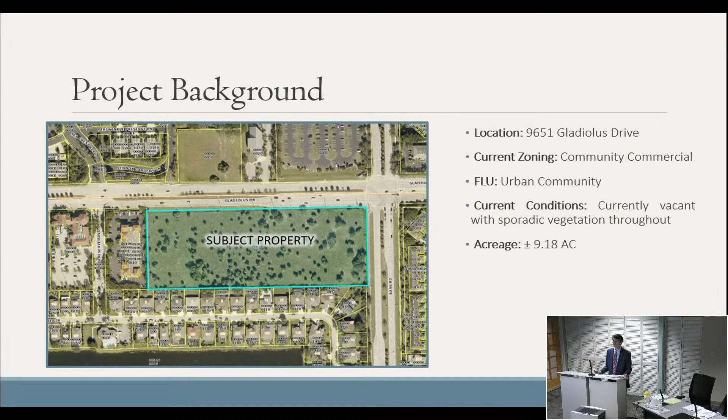So I'll briefly go into the project background before Mr. Shute comes up. As mentioned earlier, the project is 9.18 acres, located at 9651 Gladiolus Drive at the southwest intersection of Gladiolus Drive and Bass Road. The current zoning on the property is community commercial, and the future land use is urban community. It's currently a vacant lot with sporadic vegetation throughout.

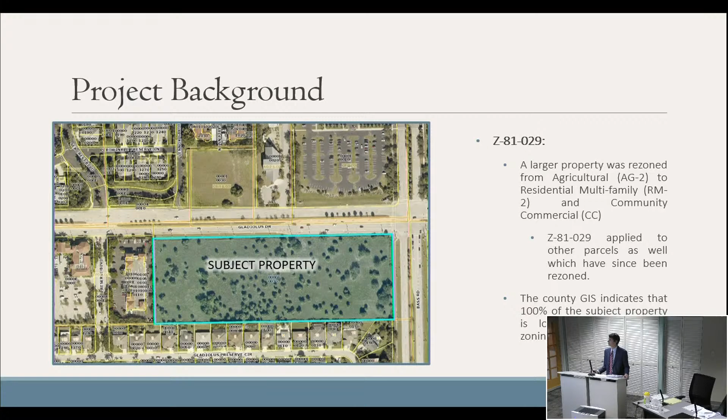The current zoning that applies to the parcel is Z81029. That 1981 zoning applied to other parcels as well as this one. Those other parcels have gone through subsequent rezonings to be changed, but this parcel's zoning remains applicable as community commercial. The request here is to change from the community commercial zoning district to a commercial planned development.

The true reason for that, as mentioned, is we're requesting a use that allows for a warehouse facility. The community commercial zoning district would allow for a mini warehouse by special exception. However, it doesn't allow for a public warehouse, and because the Land Development Code in Lee County defines public warehouse versus mini warehouse based on whether the access doors are on the inside or exterior of the building, the applicant here is requesting a use allowing a public warehouse. That would not be allowed by special exception in the community commercial district, so we need to go through the CPD process. That's the primary reason for doing that.

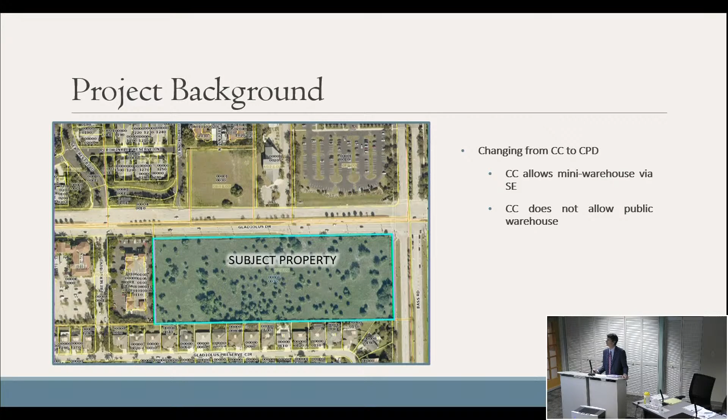As mentioned, we're asking to establish a new commercial planned development to allow for 140,800 square feet of commercial self-storage space. With that, I will turn it over to Mr. Shute, the project engineer. He can go through his background, but I know he has been accepted as an expert.

I have a quick question. Yes. In the staff report, I have some uses in the list of uses that are struck through, and I'd like to determine whether the applicant is accepting those suggested strike-throughs. We are. Okay, thank you. Thank you.

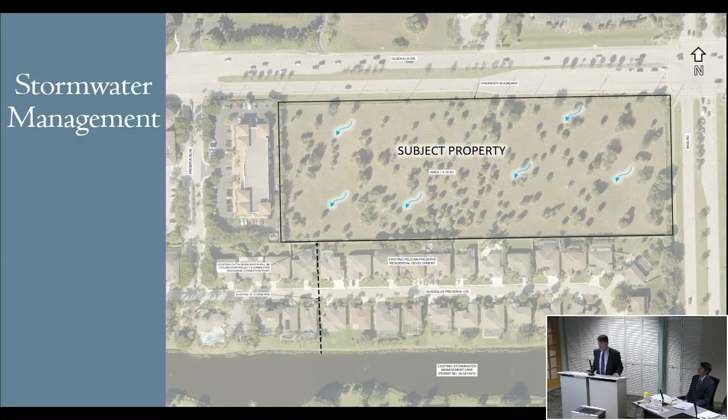So we're going to bring up the MCP. I'll hit on some of the features at this point. For water management purposes, the site concept plan depicts a large, for this parcel size, stormwater wet detention lake on the western portion of the site. The stormwater management system will have that main feature, as well as perimeter berms and some on-site dry swales to convey water to the pond.

The water management system is going to be designed to detain a 25-year, 3-day storm event per South Florida Water Management District criteria, similar to all other projects that have to obtain water management permits in this area of Florida. Where's the outfall? The outfall in this location is going to be in this general area. And is that where the culvert is? Correct, correct.

Some other features of the site, before I go into traffic. The site will have one access point, located on Gladiolus Drive. It's a single right-in, right-out access, so there'll be no left-hand turns leaving the site. The primary characteristic of the buildings is one large climate-controlled storage building, the large rectangle depicted in this location. It will be air-conditioned, with a primary entrance for members of the public who decide to lease there. It's not going to have multiple doors on the exterior, just a couple service doors, but one primary entrance for people to go to their units.

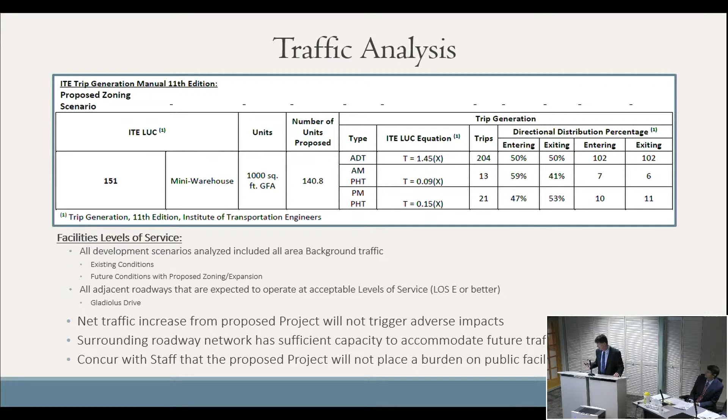Any other questions? No, thank you.

Madam Hearing Examiner, Ben Smith, who's the project planner, is going to come up next. Mr. Smith has not previously been accepted as an expert in front of the Lee County Hearing Examiner. He is an AICP certified planner, currently director of planning for Morris Depew. He's previously served as a planner for other jurisdictions, including City of Fort Myers and the Village of Estero. He's got about 15 years of experience as a planner. I'll let him come up and go through that experience a little bit more. I also have a copy of his resume here, if I could provide that to you.

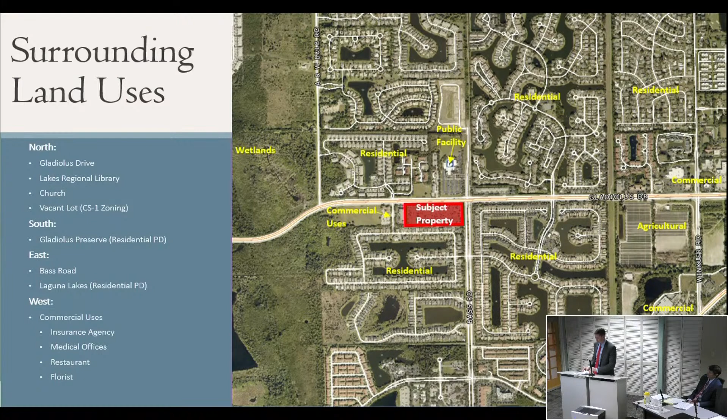The subject property is within the Lee County Utilities Future Service Area as depicted on maps 4A and 4B of the Lee Plan. Letters of request for availability for water and sewer service were sent to Lee County Utilities as part of this application, and responses were received assuring that capacity is available to meet the projected demands of the proposed development.

The project will also be serviced by the West District Office of the Lee County Sheriff's Office and the Iona-McGregor Fire District.

The proposed master concept plan has been designed with direct access to Gladiolus and parking for the project located along the Gladiolus frontage. The 3 separate storage buildings have already been described previously. The location of dry detention and wet detention areas are specified on the plan, and I'll talk about the proposed buffers in the next couple slides.

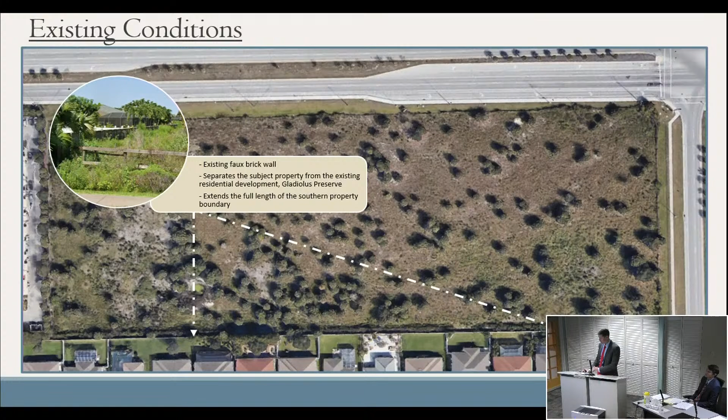Before we get into the buffers, I'd like to note that there is an existing wall on the north side of Gladiolus Preserve, and it does extend along the full length of the south property line of the subject property, and it's approximately 6 foot tall.

Here is a better view of that wall from the subject property. You can see the existing fence on the subject property, which runs parallel to the wall on the adjacent Gladiolus Preserve property. Also visible are the screen enclosures of the single-family residence on the other side of the wall.

A 15-foot wide Type D buffer is proposed on the north and east sides along Gladiolus and Bass Road frontages. A 5-foot Type A buffer is proposed along the west property line adjacent to the commercial portion of the existing Gladiolus Preserve. And a 30-foot wide Type F buffer is proposed along the south property line adjacent to the residential portion of the existing Gladiolus Preserve.

Where the southern buffer separates the proposed storage building from the residential portion of Gladiolus Preserve, an enhanced landscape buffer will be provided, which includes an additional 10 sabal palm trees per 100 linear feet. Those trees are in addition to what a Type F buffer typically consists of.

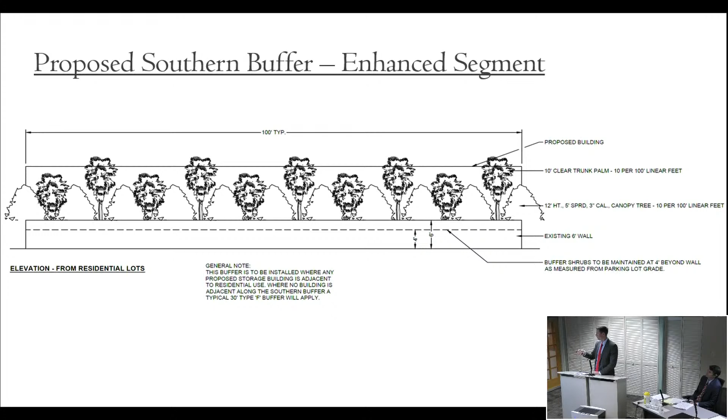So is this slide not applicable to what I'd expect to see on the residential side? We just received staff's recommended condition regarding clustering and did not have an opportunity to update this diagram. None of these are canopy trees, though. These are the canopy trees right here. If I go back a slide, here you can see, this is a canopy tree. Okay, thank you. Is that helpful? Yes, thank you.

The required building setbacks are depicted on the master concept plan, though we'd like to note that the proposed building footprints exceed the minimum setback requirements.

Do you want me to pause, Madam Examiner? Yes. Okay, so it's not clear to me from the proposed condition on the south buffer where we have an enhancement, a differentiation between the water detention area and the building. So does the south buffer condition apply only behind the building? I don't see where this is distinguished, did I miss it?

Cindy Leal for the record. The condition that staff proposed most recently does specify that the enhanced segment of the buffer is proposed along the southern property line where any storage building is adjacent to a residential use. Right, but where does this type F buffer come into play along the water retention area? The type F buffer does run along the entire segment. The only difference in the enhancement is the additional 10 clustered sable palms per 100 linear feet. So is the type F buffer required by code between the two? Yes, it's commercial next to residential.

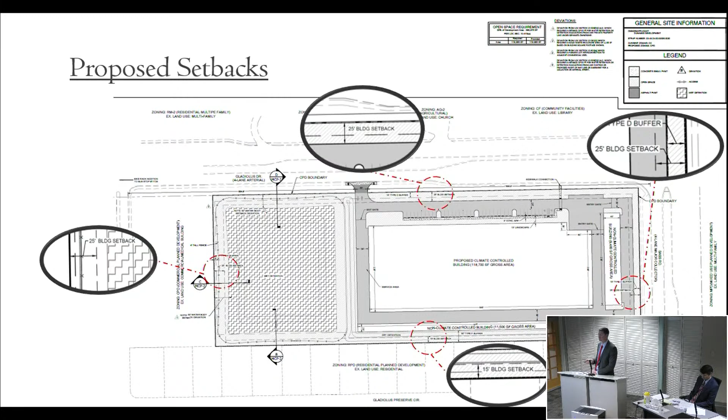I'd like to get into the proposed deviations. Deviation request number 1 is to reduce the wet detention lake setback from adjacent separately owned property from 50 feet to 25 feet on the west and south property lines. Here we have property under separate ownership; 50 feet is required by code, and we're requesting 25 feet. This request has been made to allow for greater on-site storage of water, and the applicant is offering to provide a 4-foot fence along the west and south sides of the lake to ameliorate any concerns. Staff is not opposing this deviation.

Deviation request number 2 is to reduce the size of the waste enclosure from the required 1,143 square feet to a proposed 216 square feet. As part of the lease agreement, tenants will be prohibited from utilizing the on-site waste disposal facilities. The on-site waste disposal will be used only by the staff of the administrative offices. The dumpster will be fenced off and signs will be posted around the dumpster enclosure area indicating that dumping is prohibited.

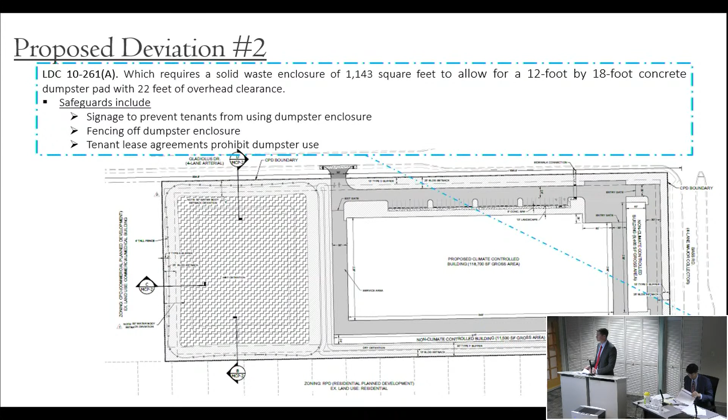Deviation request number 3 is to eliminate the requirement for an interconnection between adjacent commercial property. So that would be over here.

This request has been made for the benefit of this commercial property and those tenants. That commercial facility was not designed to accommodate regular use by the large trucks anticipated to frequent this site—think moving trucks, U-Hauls, likely to be coming here to load and unload. We believe this request will eliminate any conflicts that could arise if those trucks are traversing between this property and that commercial property.

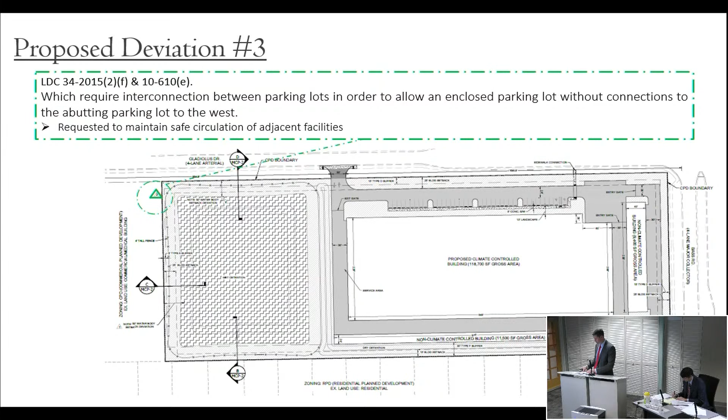Deviation request number 4 is to reduce the wet detention lake setback from an arterial right-of-way line from 50 feet to 25 feet on the north property line. So here's the Gladiolus arterial—50 feet is required, we're proposing 25 feet. This is to allow for greater on-site storage of water, and the applicant is offering to provide a 4-foot fence in that area.

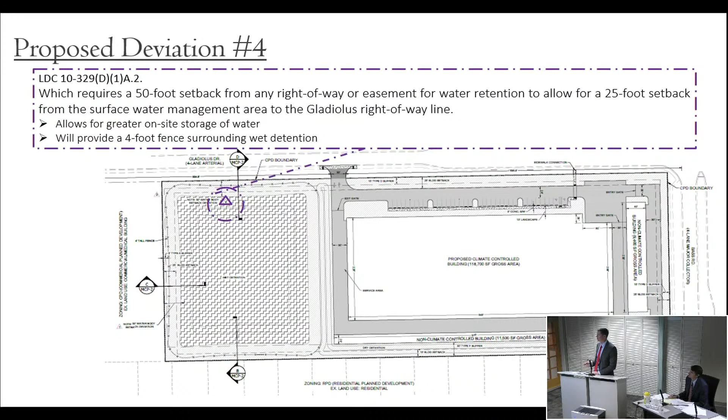Is there any specifications on the fence to be provided in that area since it's along Gladiolus? There is no specification, but basically it has to be a solid fence, cannot be barbed wire or anything like that. Can't be chain link? Cannot be chain link, no. And we're prepared to meet whatever code requirements are applied to that fence.

I'd like to get into Lee Plan consistency if there are no other questions about the master concept plan or the deviations.

Again, this is located in the urban community future land use category. The description includes that predominant land uses in that category will be residential, commercial, public and quasi-public, and limited light industrial, with future development encouraged to be mixed use.

Rezoning the subject property from community commercial to commercial planned development will allow for commercial development that will support the existing surrounding uses. The underlying future land use category is characterized by a mixture of relatively intense commercial and residential uses, which would accurately describe the proposed commercial project. The CPD's proposed schedule of uses has been tailored to address the project's specific commercial needs.

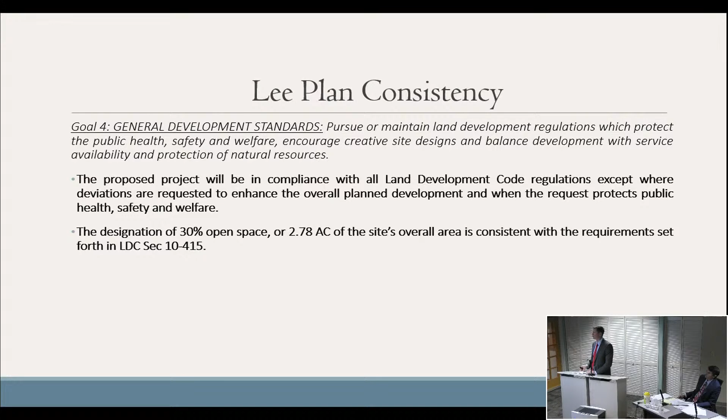The project is providing 30% open space, or 2.78 acres of the site's overall area, which is consistent with the requirements set forth in Land Development Code Section 10-415.

Lee Plan Standard 4.1.1 and 4.1.2, water and sewer: potable water and sanitary sewer services will be provided to the site by Lee County Utilities. A letter of availability from Lee County Utilities is enclosed in the application package, and that letter indicates that service is available to accommodate the projected demand.

Policy 6.1.1: all applications for commercial development will be reviewed and evaluated as to—and the policy goes on to list several criteria, 8 criteria, with parentheses indicating whether it applies to a rezoning, development orders, or both. Criteria B has been stricken on this page because it applies to development orders only; the rest do apply to rezonings.

A traffic impact study was performed to assess traffic and access impacts. The findings of the study include a trip generation of 21 total PM peak hour trips and 13 AM peak hour trips. The surrounding roadway network has sufficient capacity to accommodate the additional trips generated from the proposed use, and no major roadway improvements are necessary.

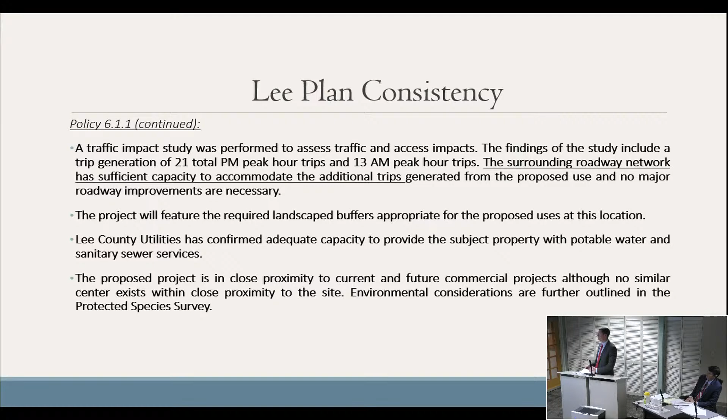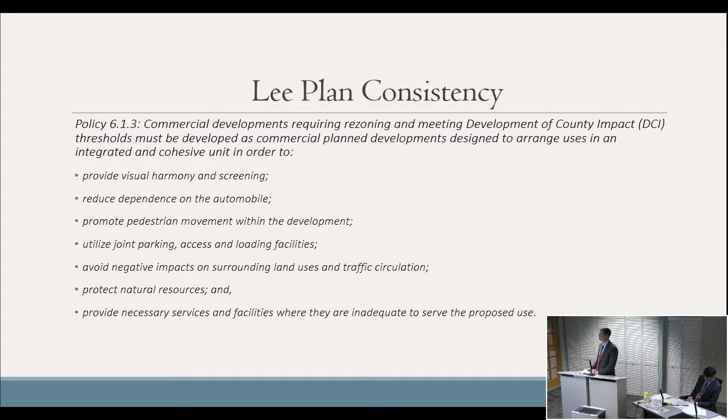Policy 6.1.3: commercial developments requiring rezoning and meeting development of county impact thresholds must be developed as commercial planned developments, designed to arrange uses in an integrated and cohesive unit in order to provide visual harmony and screening, reduce dependence on the automobile, promote pedestrian movement within the development, utilize joint parking, access, and loading facilities, avoid negative impacts on surrounding land uses and traffic circulation, protect natural resources, and provide necessary services and facilities where they are inadequate to serve the proposed use.

The project is being developed as a commercial plan development in direct compliance with the aforementioned policy. The project will feature the required landscape buffers appropriate for the proposed uses at this location. The commercial plan development will provide the required stormwater management features. The proposed master concept plan depicts how all intensity will be isolated on a portion of the property, which will promote pedestrian movement within the project and eliminate the need for vehicular travel internal to the site. The project is in a predominantly residential area with a variety of existing and planned commercial uses.

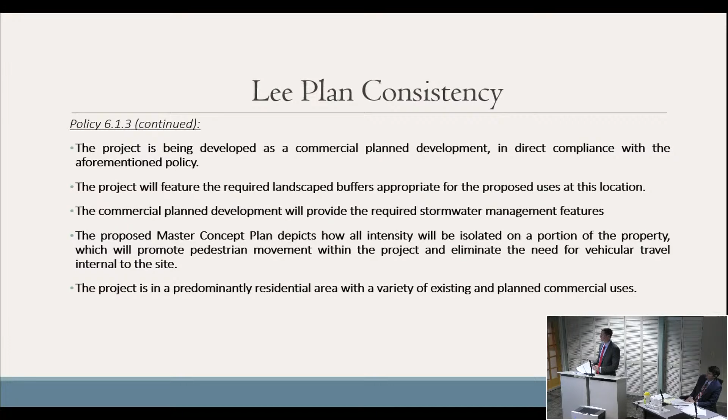Policy 6.1.4: commercial development will be approved only when compatible with adjacent existing and proposed land uses and with existing and programmed public services and facilities. The proposed project is in an area with existing commercial projects to the west of the subject property and across the street to the north. The planned development would serve significant consumer demand in the area for this facility.

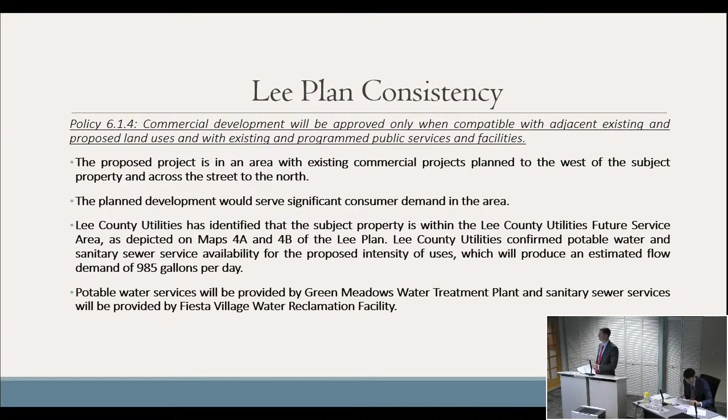Lee County Utilities has identified that the subject property is within the Lee County Utilities future service area as depicted on maps 4A and 4B of the Lee Plan. Lee County Utilities confirmed potable water and sanitary sewer service availability for the proposed intensity of uses, which will produce an estimated flow demand of 985 gallons per day. Potable water services will be provided by Green Meadows Water Treatment Plant, and sanitary sewer services will be provided by Fiesta Village Water Reclamation Facility.

Policy 6.1.6: the land development regulations will require that commercial development provide adequate and appropriate landscaping, open space, and buffering. Such development is encouraged to be architecturally designed so as to enhance the appearance of structures and parking areas and blend with the character of existing or planned surrounding land uses. The project is abiding by all Land Development Code regulations except where deviation has been requested, which will not cause impacts to public health, safety, or welfare.

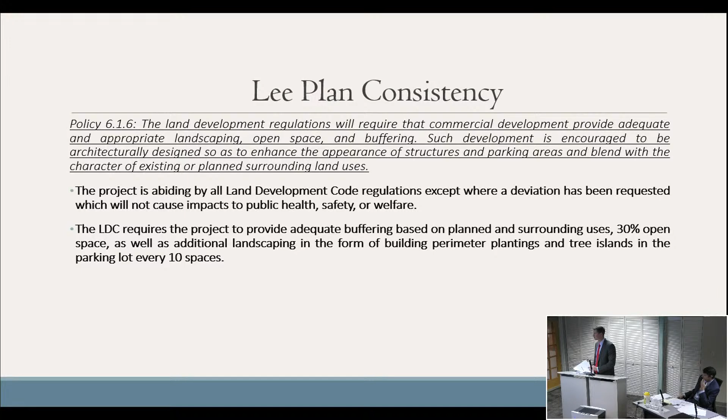The Land Development Code requires the project to provide adequate buffering based on planned and surrounding uses, 30% of the site to be open space, as well as additional landscaping in the form of building perimeter plantings and tree islands in the parking lot spaced every 10 spaces.

Policy 6.1.7: prohibit commercial developments from locating in such a way as to open new areas to premature, scattered, or strip development, but permit commercial development to infill on small parcels where existing commercial development would make a residential use clearly unreasonable. The site is an undeveloped property that is adjacent to an existing commercial planned development.

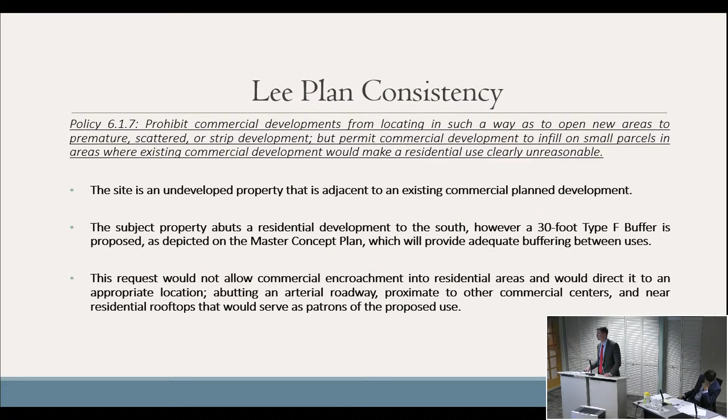The subject property abuts a residential development to the south. However, a 30-foot type F buffer is proposed as depicted on the master concept plan, which will provide adequate buffering between these uses. The request would not allow commercial encroachment into residential areas and would direct it to an appropriate location abutting an arterial roadway proximate to other commercial centers and near residential rooftops that would serve as patrons of the proposed use.

Land Development Code Section 34-145-D4A1 provides criteria for rezonings. Criteria A: that it complies with the Lee Plan. The request is consistent with the uses set forth by the Urban Community Future Land Use Designation.

Criteria B: meets this code and other applicable county regulations or qualifies for deviations. The request complies with all sections of the Land Development Code except where deviations are requested, and demonstrates the protection of public health, safety, and welfare.

C: is compatible with existing and planned uses in the surrounding area. The proposed development is highly compatible with the surrounding land uses given the existence of proximate commercial uses as well as planned commercial uses.

D: will provide access sufficient to support the proposed development intensity. Access to the property is provided via Gladiolus. The traffic impact study demonstrates that the request results in minimal impacts. The current access is sufficient to support the proposed use.

E: the expected impacts on transportation facilities will be addressed by existing county regulations and conditions of approval. Approval of the request will not have a significant impact on the surrounding roadway network as outlined in the zoning traffic impact study.

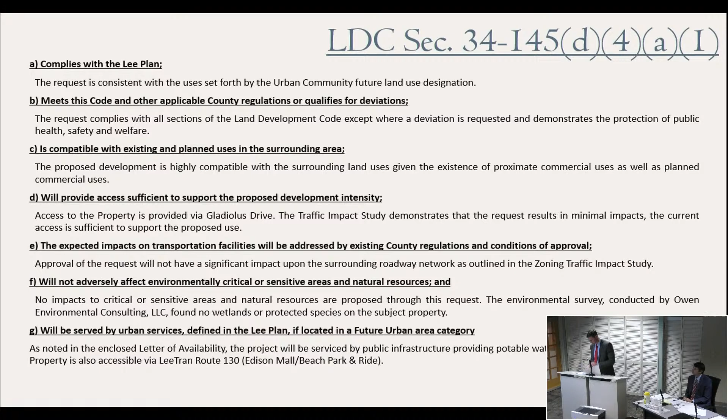The proposed use or mix of uses is appropriate at the proposed location. It abuts an arterial roadway which has sufficient capacity to access the property. It is surrounded by commercial uses of different nature and is located in proximity to residential patrons.

B, the recommended conditions provide sufficient safeguards to the public interest and are reasonably related to the impacts on the public interest expected from the proposed development. The proposed development will not have a negative impact on the community. All proposed elements of the development, including deviations, protect the public interest.

C, if the application includes deviations pursuant to section 34-373A9, that each requested deviation: 1, enhances the achievement of the objectives of the planned development, and 2, preserves and promotes the general intent of this code to protect the public health, safety, and welfare. All deviations requested enhance the planned development's ability to function as designed in a compact site with very limited environmental impacts.

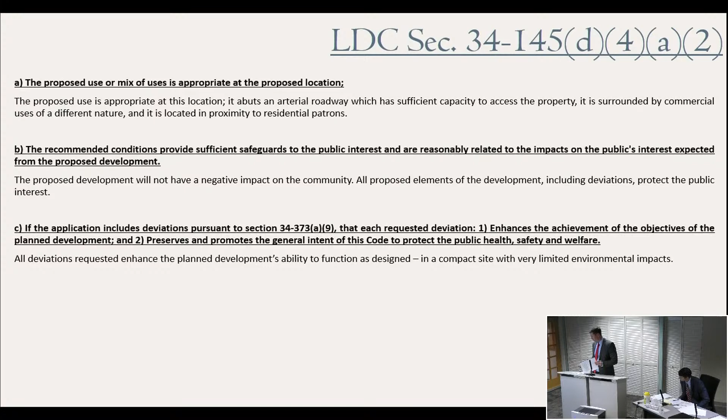Are there any questions before I conclude? No, thank you, go ahead. I'd like to conclude by saying we appreciate this request. For the record, staff is recommending approval of this request. We are happy to remain and discuss any of the testimony that's been provided, the application materials submitted, or respond to any questions. Thank you, thank you very much.

Madam Hearing Examiner, the last thing before we conclude our presentation is you asked for clarification on the condition that staff and the applicant had agreed upon, specifically 2G, as numbered in staff's response on February 1, 2023. It's intended to plot that condition stating that the landscape plans must include architectural drawings depicting no doors, windows, and/or mechanical equipment along the rear of the storage building. It's intended to apply only to the southernmost building, the 11,500 square foot building. Staff agrees, so if you'd like us to discuss how to clarify that in language before we conclude here today, we can.

The taller building can have window openings. Yes, that's correct. Just so I understand, yes. Okay, I'm just going to add 'southernmost storage building.' I think that pretty much covers it, right? I think it does, yeah.

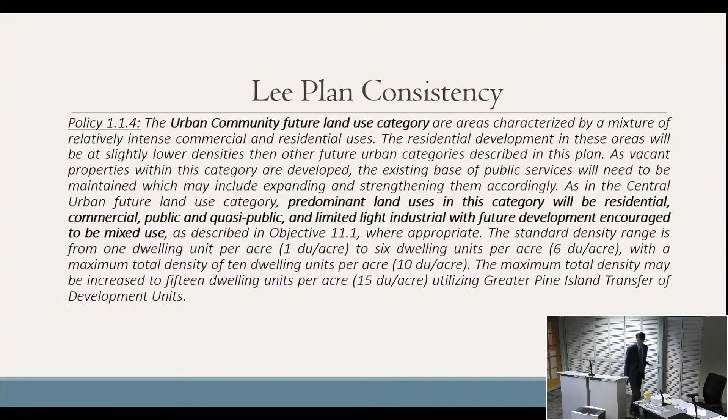Oh, thank you, I can read. Thank you, I'm gonna keep this one. You sure she needs that? What is it, she likes all that being written like that. Yeah, I think... but she, depending on, you can hit the policy and say it complies because X, Y, Z, and it just depends. I got that, I got the hurry up eyes. Yeah, I mean she's taking notes and stuff. By the end she's kind of like, all right, I get it, you gotta go through this, but I get it, it's consistent, that's kind of it. I hate the hurry up eyes. You hate what? I hate the hurry up eyes.

There's this judge in Tallahassee, when I first got out I practiced in front of him, a federal judge. He used to be able to tell he'd heard enough. If he wasn't buying your position or had questions, he'd hammer you. But if he just thought you were right, he wouldn't ask anything. One of the first motions I argued was a motion for summary judgment, in the federal courthouse, which is massive, you feel like an ant up there. He asked me one or two questions, then you could tell he lost interest, took off his glasses, started cleaning them. I said, 'Judge, I had more argument I could go through, but I think I covered it.' He goes, because of his glasses, 'Smart man.' Then he turns to the other side and says, 'I'm ready to hear you.' Then he granted my motion, I'll never forget that. You could tell he was like, 'I'm over it, smart man, sit down.' I'm gonna signal to you that I'm over it. That's right, I think that's what the cleaning of the glasses was for. Context clues, yeah, yeah.

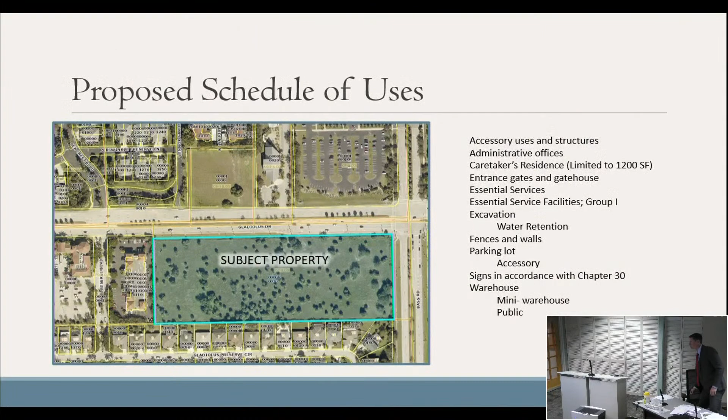You need a break? No, do you think they look a little befuddled? No, I'll take the time.

All right, thank you, Madam Hearing Examiner. Mr. Schute's going to come up and talk about stormwater runoff and traffic.

Is it possible to move the camera on the bottom right? Maybe you can shift what's behind it? I don't know how to shift that. Is it possible to minimize it? So you're going to focus on the placement of the dumpster? It's just one of the items on the list, the one in that south corner.

Correct, well I will focus on water management at this moment. To the questions on the water management lake, South Florida Water Management criteria requires us to do an analysis to show the site will not discharge more water than it currently does, and will not increase the discharge rate, the flow of water coming off the site in a post-development condition. So let's pause for a minute. What that means is the South Florida Water Management District regulates the design of the stormwater management system to ensure that culvert is not forced to take more water than is traveling through it right now at a faster rate.

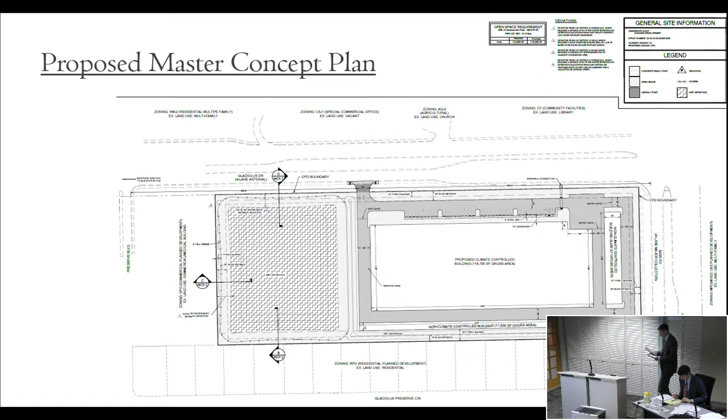Madam Examiner, can I address the concern regarding lighting? Section 34-625 of the Lee County Code places requirements on lighting for facilities such as this. It will require that all fixtures be fully shielded, meaning the bulb will not extend past the actual structure of the light, allowing the light to be directed downward and not outward from the fixture.

It also requires that at the boundary perimeter adjacent to residential, the foot candles, the measurement for lighting, will be extremely low, demonstrated through a photometric plan submitted at time of development order. This will show the foot candles generated throughout the entirety of the site, demonstrating compliance with the code and ensuring the light intensity at that property boundary adjacent to residential will be, if I recall, about 0.2 foot candles. Thank you.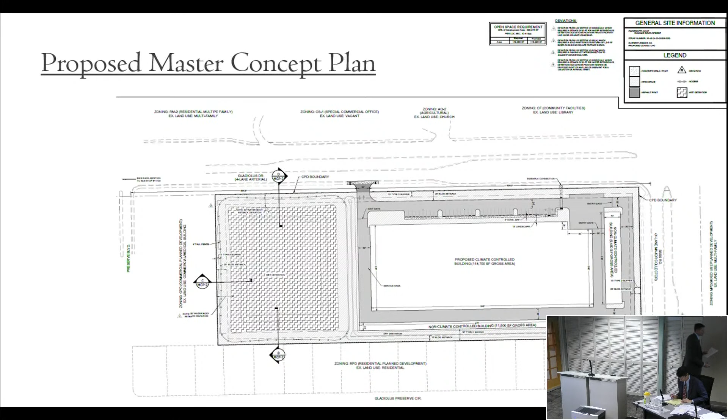Regarding the architectural standards for this project, Chapter 10 speaks specifically to commercial design. The architectural requirements specify architectural features and patterns consistent with the community's identity and local character, while reducing mass, scale, and uniform monolithic appearance of large unadorned walls. That is verbatim from Land Development Code Section 10-620A. Additionally, all primary facades must be designed with consistent architectural style, detail, and trim features, and buildings must provide a minimum of 3 of the following: awnings and attached canopies, overhangs, porticos, arcades, peaked roof forms, display windows, clock or bell towers, or any other treatment which the director finds meets the intent of this section.

Additionally, large projects are required to include one of the following: specialty pavers, fountains, reflection ponds, or other water elements, surface and stormwater management facilities designed as physical or visual amenities that provide open space or aesthetic features, or any other alternative treatment or combination of the above as approved by the Community Development Director.

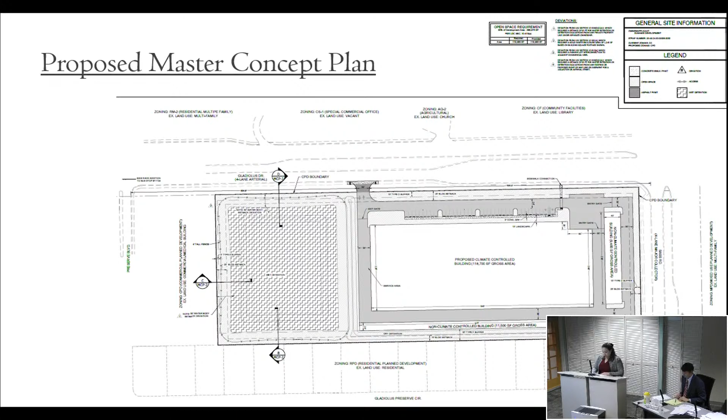In addition, corner lots are specifically addressed within Chapter 10 of the LDC. They require additional architectural embellishments, such as corner towers or other design features, to emphasize their location as gateways and transition points within the community. This section of the LDC also addresses roof treatments, blank wall areas, materials, and a portion of the signage code.

And when will this criteria come into play in connection with the development of this site? During the development order phase, we will address all of these items. The development orders require elevations of architecturals, landscape plans, and photometrics plans, as previously mentioned, and it will all be addressed during that time.

Okay, thank you very much. Do you want me to go into buffers? Yes, please.

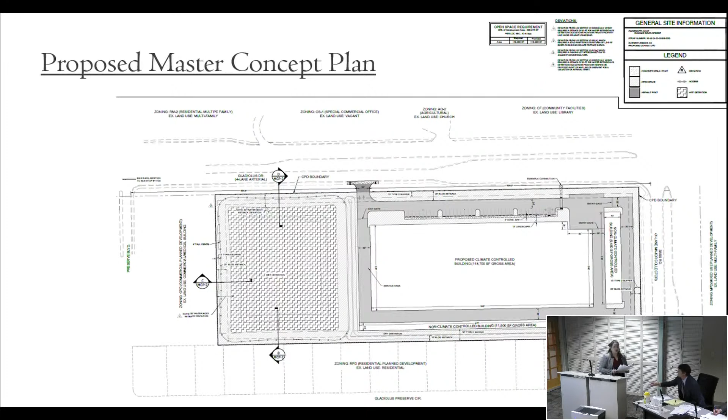I'm just going to briefly recap the proposed landscape buffers for the project.

To the north and to the east, we are proposing a 15-foot wide Type D vegetative buffer. A Type D buffer requires 5 trees per 100 linear feet. Additionally, we are required to provide a hedge, which would be in a double staggered row.

Adjacent to the commercial portion on the western side, we are proposing a 5-foot wide Type A landscape buffer. This only requires 4 trees per 100 linear feet since we are abutting commercial with commercial.

The 30-foot wide Type F buffer is proposed along the entire southern perimeter of the property. This requires 10 trees per 100 linear feet and a hedge required in a double staggered row.

Wherever the southern building, which is a non-climate controlled building, abuts residential, we are proposing an enhancement. This enhancement will consist of an additional 10 trees per 100 linear feet, specifically cabbage palms. So it's 10 plus 10, or 20 trees per 100 linear feet. Yes.

Are there any questions? Okay. Did you have anything? Thank you.